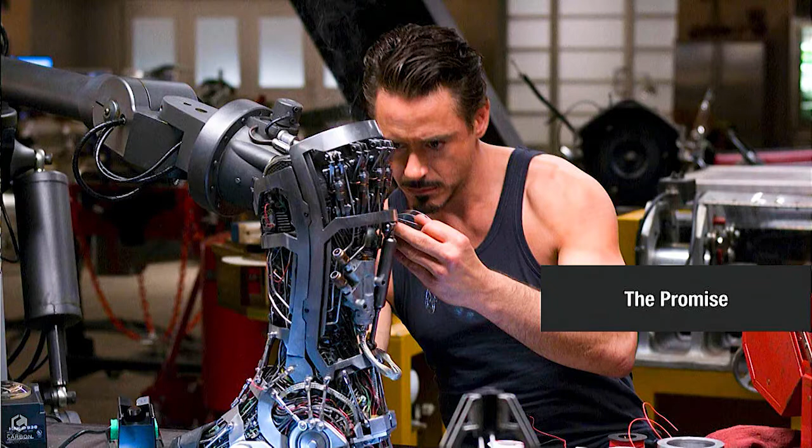The reality is very different. The reality is that robots struggle to do even the most simple tasks. And in fact, in manufacturing today, 90% of all the tasks that could be automated are actually done by hand. We think it's robots whizzing around factories, but the reality is much more like this: rows and rows of people performing mind-numbing tasks for hours and hours on end.

So this is bad for people. It's also really bad for business. Operating margins in this industry are anywhere from 2 to 4.5%. That's very thin, and 80% of their costs are labor. So when you factor in rising wages, foreign competition, and the fact that very few people actually want to do these jobs, they're in dire straits.

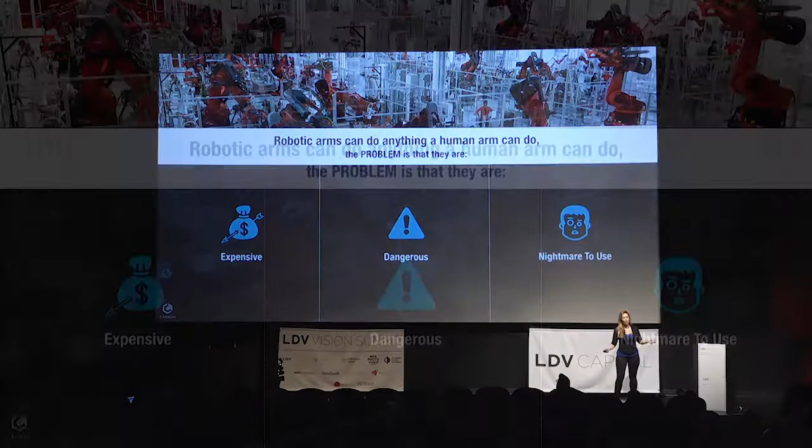So you might be wondering, well, why don't they just automate? I mean, after all, a robotic arm can do anything a human arm can do mechanically. But the problem is that they're expensive, they're dangerous, and they're an absolute nightmare to use.

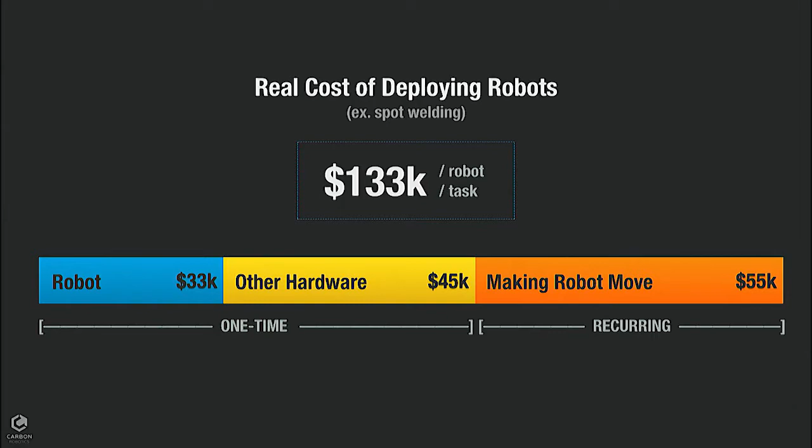So to give you some specific numbers around this, for your average robotic deployment, it's going to be $133,000 per robot per task. That's $33,000 on the arm, another $45,000 on attachments and making it human safe, and then $55,000 and several weeks of downtime just to make it move. And that third part is recurring. Every time you want to change a simple task, you have to hire integrators who come back in, and it's another few weeks and another $55,000.

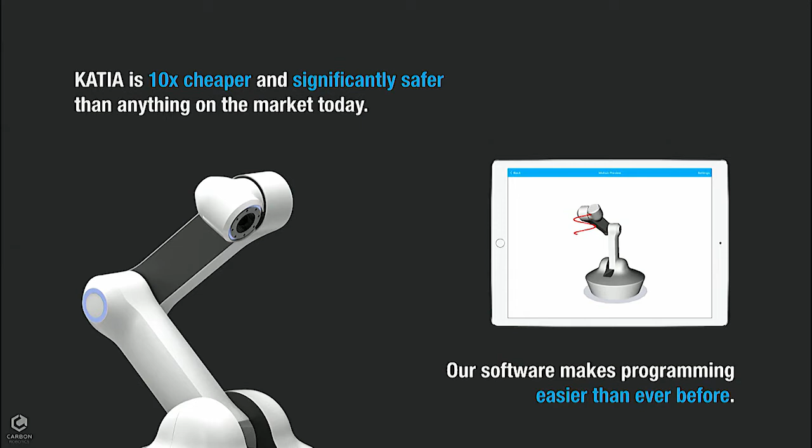And so this is really the problem that we set out to solve at Carbon. So KATIA, Kick-Ass Trainable Intelligent Arm, is about 10 times cheaper than any other robot on the market today. It's significantly safer. And our software, where the real magic happens, makes it easy for anyone to set up their own tasks.

So normally we talk about the mechanics behind this and how we've been able to do that. But since this is a vision summit, we're going to talk about the software and some of the role of vision in this.

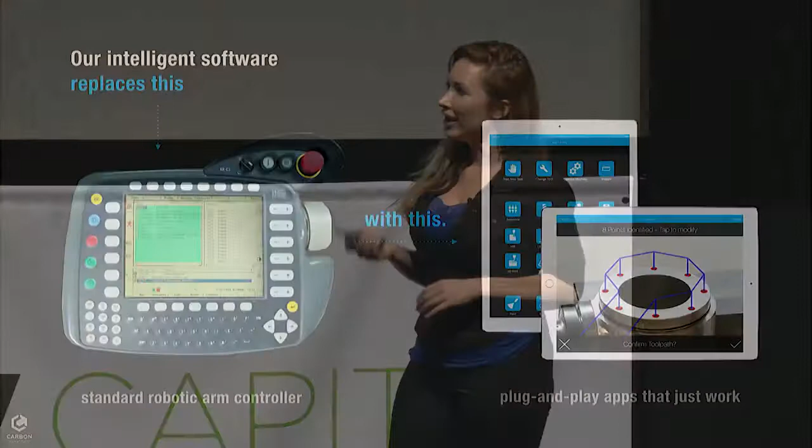So what you're looking at on the left is a traditional robotic arm controller. This is a KUKA controller. It's running Windows XP. And actually, fun fact about KUKA: to program a KUKA robot, you need to know KRL, which is KUKA Robot Language. There is a school in Michigan where you can go and get certified. But as you can imagine, not many people know how to do that.

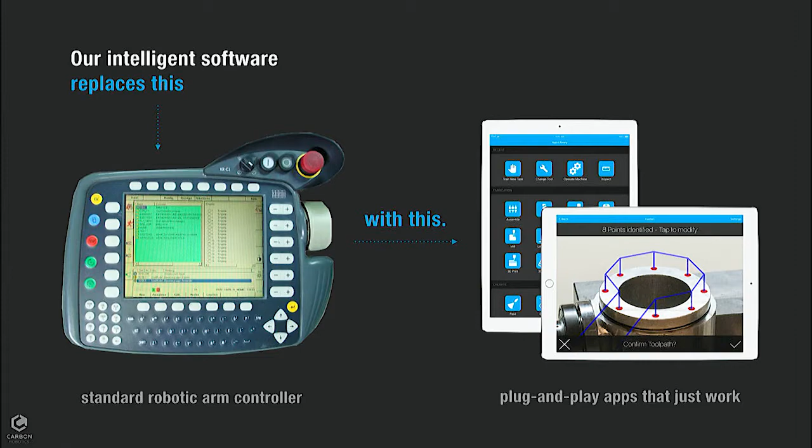So we completely rethought how we do this, and we have task-specific plug-and-play apps that essentially just work. Now you might be wondering, well, why is it so hard to program a robot? In addition to the KRL nonsense, robots are actually dumb and they're blind.

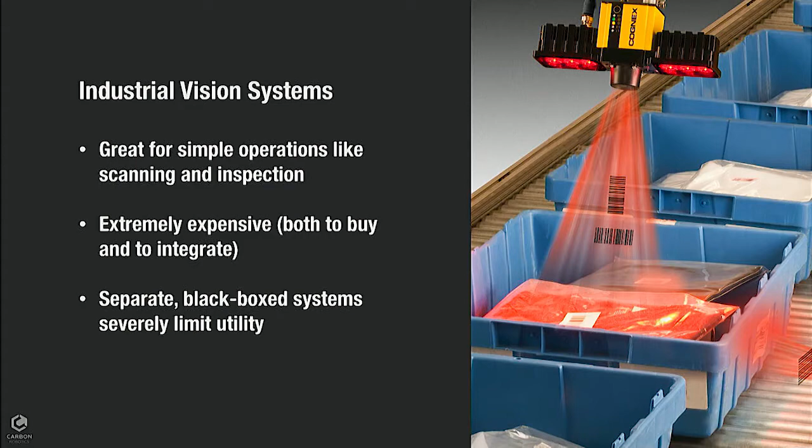So there are industrial vision systems today, and these are great for very simple operations like taking a snapshot, sending it back to the arm, where they scan or they do simple inspection where you get a quick yes, no, go, no-go scenario. But the problem, in addition to being ferociously expensive, is that they're very difficult to integrate. These are standalone, black-boxed systems, completely separate from the kinematics of the robot.

So to imagine what this is like, you can imagine if you were blindfolded and someone was telling you where to go and what they were seeing.

You might be able to avoid obstacles, you might be able to cross a street, but you could never catch a ball, because you don't have tight enough integration between your eyes, your brain, and your motion. And it's the exact same thing with robots.

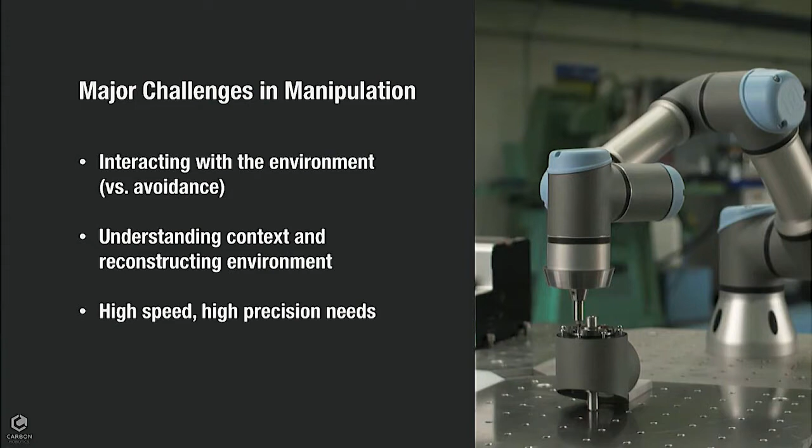Specifically, when we're talking about robotic arms, we're not just sensing the environment or avoiding it, we're physically manipulating it, we're interacting with it. This means we need to understand our context, reconstruct the context, and understand how that's changing, all while maintaining very high speed and very high precision.

In many cases, the challenges for other applications are accuracy on the order of centimeters. We're dealing with microns. This is a very intelligent audience, so I won't belabor the point.

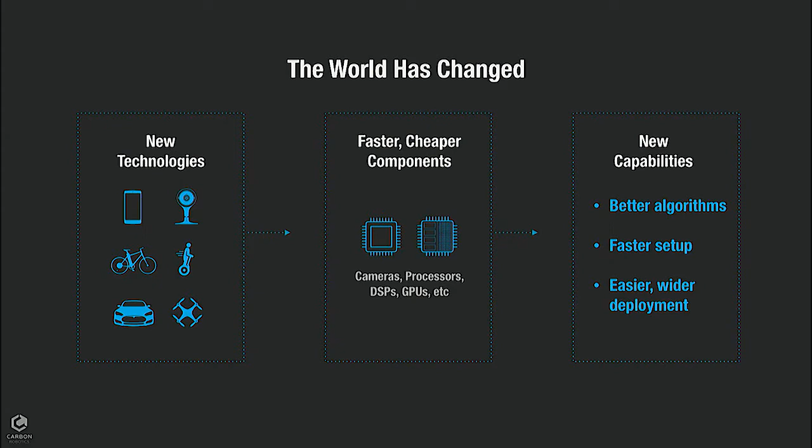We benefit, like everyone else, from the reduced cost and increased speed of cameras and processors. We also benefit a lot from electric vehicles, IoT, and funnily enough, smart washing machines, which I can tell you about later if you're interested.

And all of these have come together to enable us to run very fast algorithms on the device, leading to faster setup, easier, wider deployment, which in turn improves our algorithms. It's this way that we're able to get the very tight integration between hardware and software.

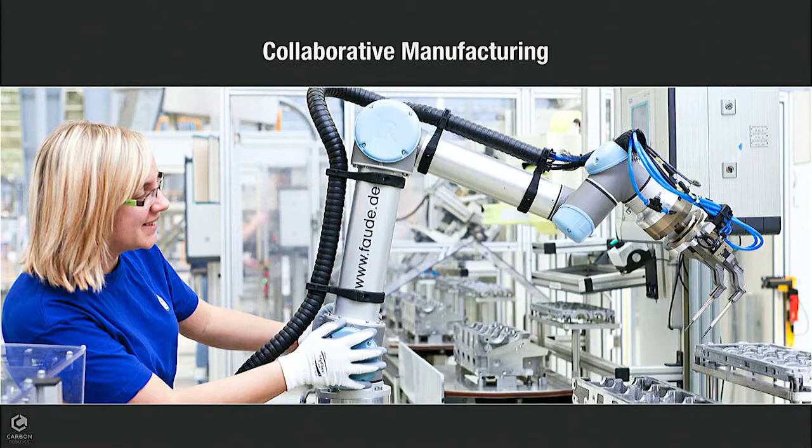So the first obvious application is manufacturing, for all of the reasons that we described earlier. This is really where you're seeing the biggest push. If you've heard of Industry 4.0, advanced manufacturing, this is where the biggest investment and the biggest push is coming for smart robots. But it certainly isn't the whole story.

Medical research is another huge opportunity for us. Much like manufacturing, most research today, around 90% of all published research, is actually done by hand. Many of us have either been the grad student or known the grad student who's manually pipetting in labs. And there's huge problems with reproducibility.

There was a study in 2012 where Amgen tried to reproduce 53 landmark cancer studies, and they found that only 6 of those were sufficiently reproducible enough to design studies around.

This is one of my favorite examples. This is a robotic arm attached to a wheelchair. This man is paralyzed, almost completely paralyzed from the neck down. He's been unable to leave his house, to open doors and to navigate the world. But with this, he's able to, for the very first time, actually pour his own drink.

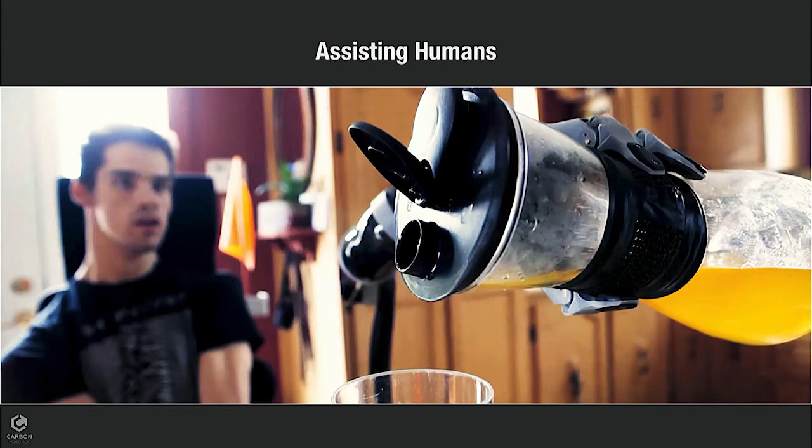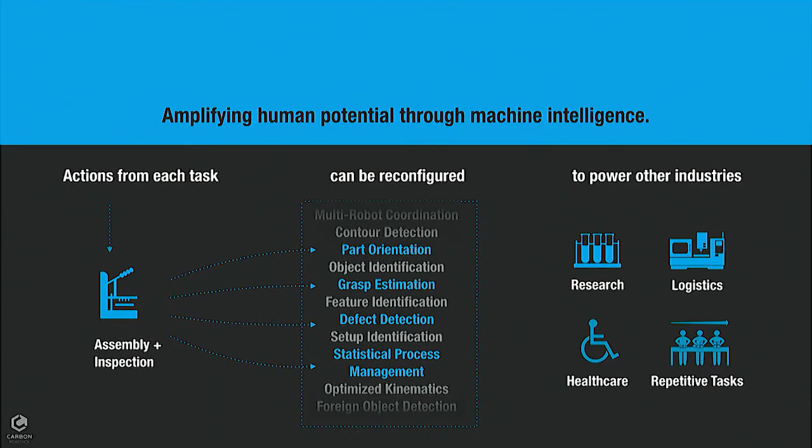And so while these might look like wildly different applications, behind the scenes, there's actually a lot that they have in common. The actions that go into pipetting in labs are very similar to what you need to dispense adhesive, and then can be reconfigured.

The key is understanding how these elements can be reconfigured and then enabling people to build on top of them. So in many cases, we're not just talking about specific industries, we're actually talking about a new type of labor. And I'll leave you with one final thought, which is humans are by nature tool builders.

It is one of the things that we do best. And many of our recent inventions, computers, smartphones, the internet, have been tools for the mind. What we now have are tools for the mind and the body. And it's our belief at Carbon that by making robotic arms dramatically more accessible, we can build the foundation for a much more equitable society, one that greatly alleviates human suffering and amplifies what it means to be human.